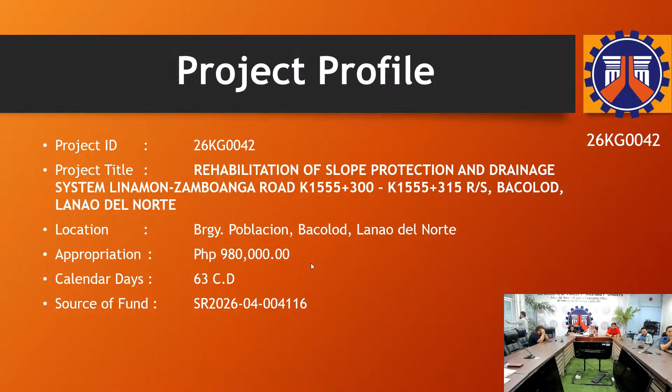Thank you, Madam Chair, and good morning everyone. So for the project in maintenance section, we have our first project, 26KG0042, project title: Rehabilitation of Slope Protection and Drainage System along Linamon-Zamboanga Road, K1555+300 to K1555+315, right side, Bacolod, Lanao del Norte. It is located at Barangay Población, Bacolod, Lanao del Norte, with an ABC of 980,000, with 63 calendar days, and the source of fund is SR 2026-04-004116.

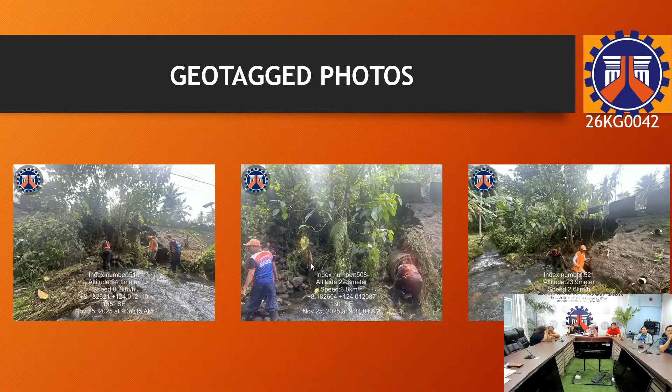Next, we have here the location of the project. Next, geotag photos during the geotag photos on site. So we can see it is indeed damaged.

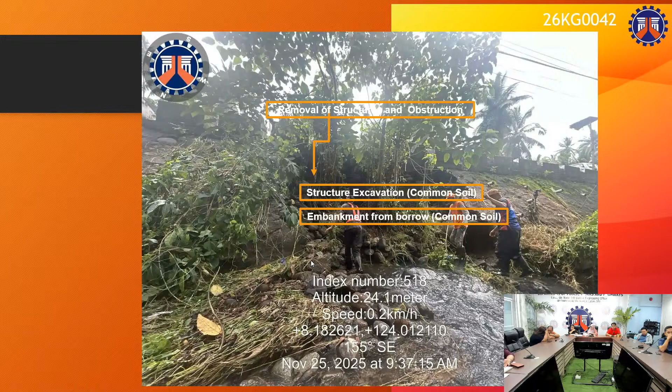So this is the actual pictures on site and the actual activities we will conduct. So this is the plan. We have the 4 meters height and then 1.5 meters shoulder and a wheel guard.

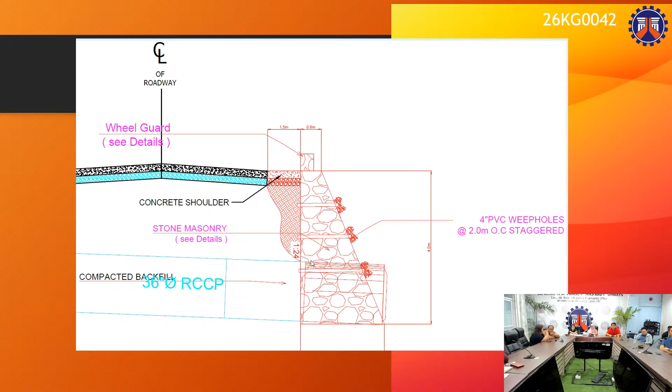This is based on the actual dimensions on site. For the next project, we have 26KG0043: repair and maintenance of slope protection and drainage system along Linamon-Zamboanga Road, K1553 plus 700 to K1553 plus 720, right side, located at Barangay Población, Bacolod, Lanao del Norte.

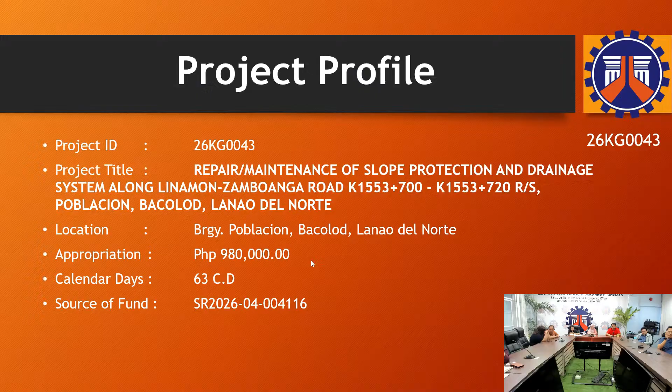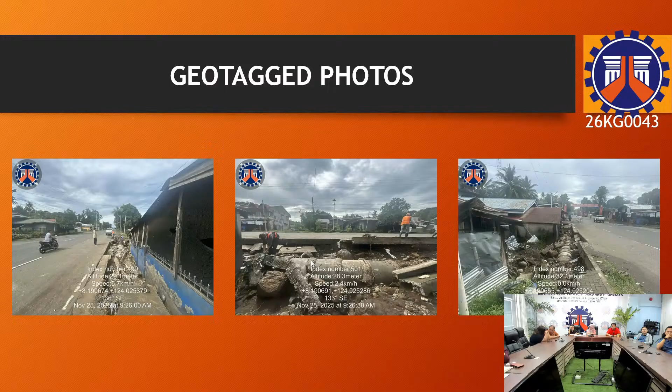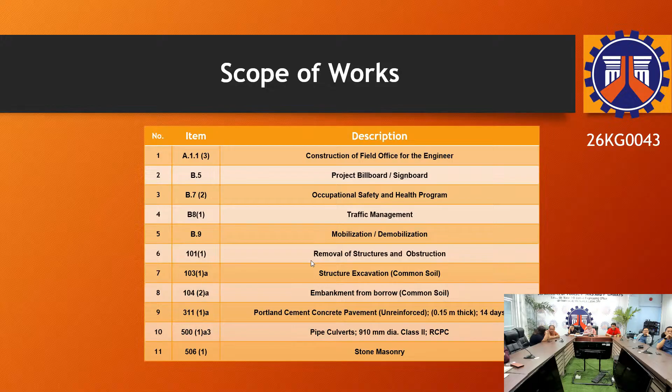For the scope of work, we have construction of field office for the engineer, project billboard, occupational safety and health program, traffic management, mobilization, removal of structure and obstruction, structure excavation, embankment from borrow, PCCP with 0.15 meters thickness, 14 days, pipe culverts 910 mm diameter class 2 RCPC, and stone masonry.

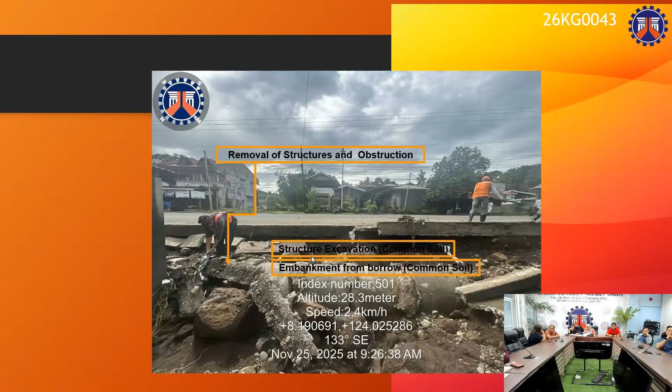For the equipment pledge, we have one bagger mixer, dump truck, water truck, plate compactor, and backhoe. For the activities: first, removal of structures and obstruction, structure excavation, embankment from borrow and common soil; next, stone masonry, PCCP of the shoulder, and then pipe culverts.

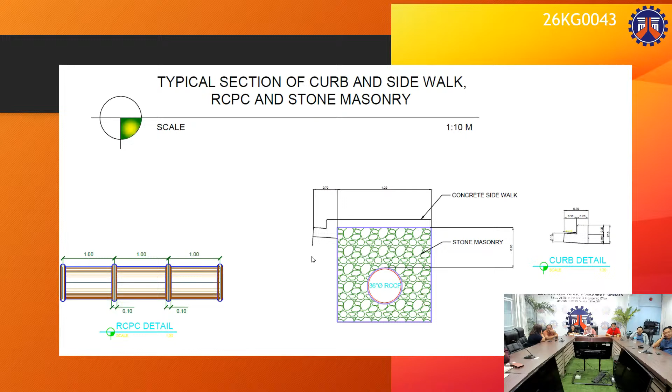This is a typical plan for the project. We have a 1.2 meters concrete sidewalk, 36 inches diameter RCPC, and stone masonry.

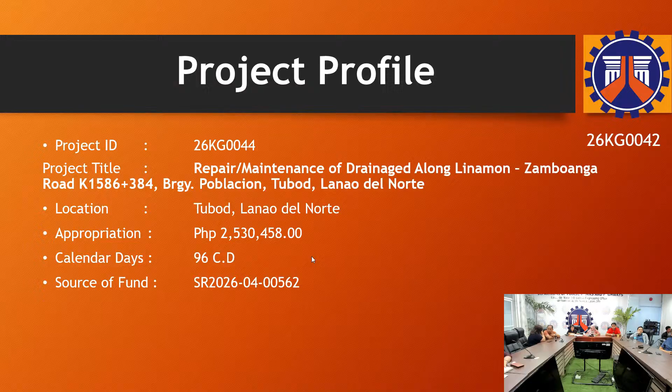For the third project, we have 26KG0044: repair and maintenance of drainage along Linamon-Zamboanga Road, K1586 plus 384, Barangay Población, Tubod, Lanao del Norte, with an appropriation of 2,530,458 pesos and 96 calendar days, source of fund SR 2026-04-00562.

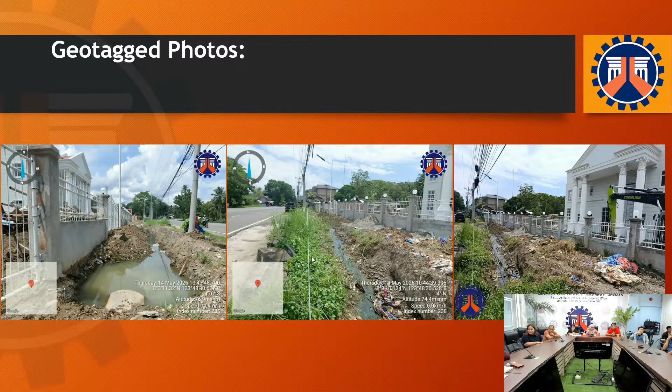For the scope of work: construction of field office for the engineer, provision of furnitures, fixtures, and appliances for the field office, project billboard, occupational safety and health, mobilization, removal of actual structure obstruction of 0.23 mm thick PCCP, removal of actual structures obstruction of 0.05 mm thick ACP, and removal of actual structure obstruction of 910 mm diameter RCPC, structure excavation, embankment from structure excavation, aggregate sub-base, emulsified asphalt, bituminous concrete surface hot laid 40 mm thick, PCCP 0.28 meters thick, 14 days, reinforcing steel grade 40, structural concrete, lean concrete, line canal rectangular reinforced concrete, and grouted riprap class A.

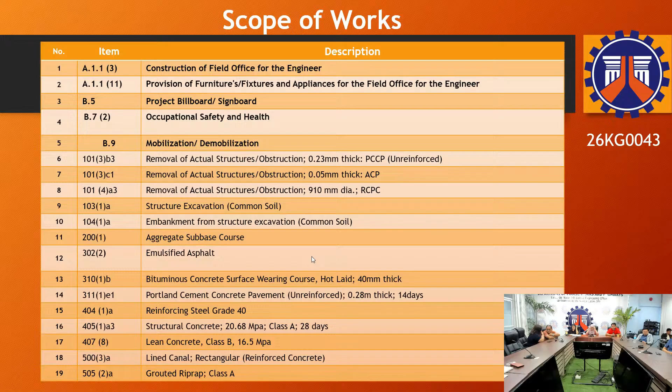For the equipment requirements, we have 2 dump trucks, 1 payloader, backhoe with breaker, water truck, boom truck, asphalt distributor, power broom, pneumatic tire roller, tandem steel roller, transit mixer, concrete vibrator, concrete screeder, bar cutter, bar bender, cargo service truck, and a 1 bagger mixer.

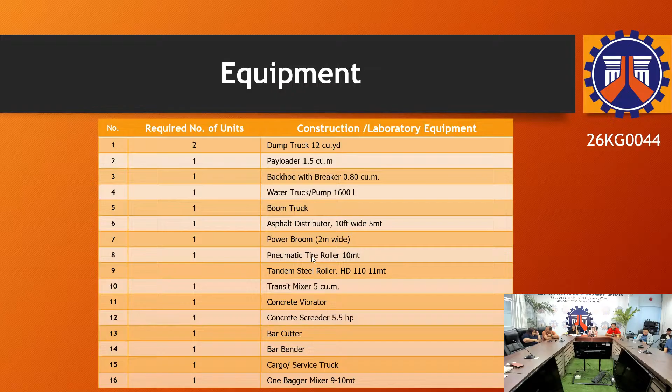This is a typical plan for a single barrel RCBC on site. And the typical plans of the line canal: we have 1.2 meters wide and 0.80 meters height, with a 0.40 and 0.40 I-cover.

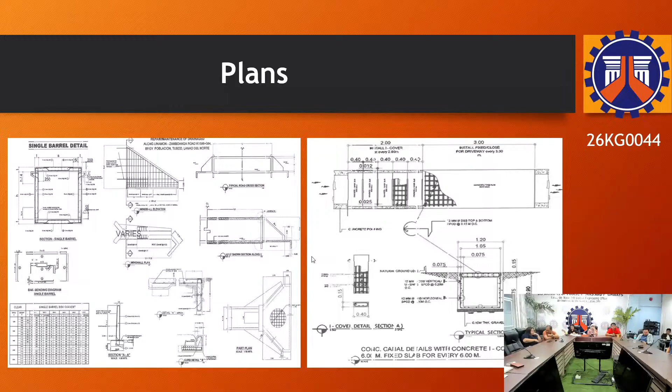So that's all for the three projects. Madam Chair, thank you.